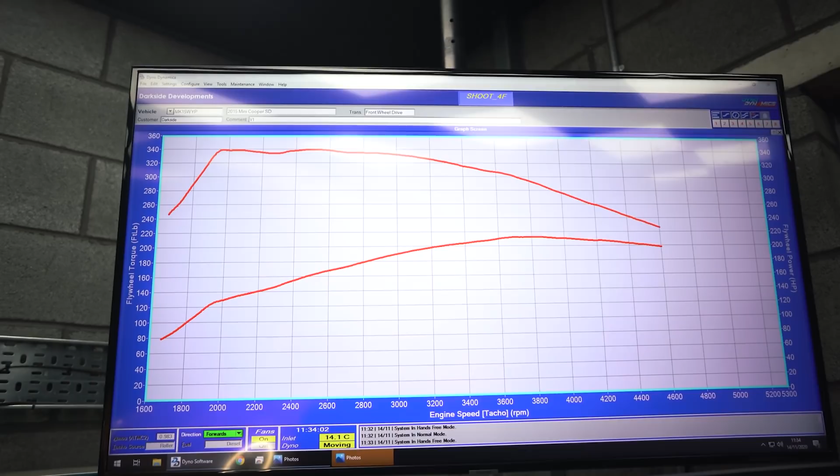Things have changed a little bit on this since I last drove it. I said we're going to get it on the dyno next, but we're quite busy. So we got a little bit of free time while the Mini was sat there, and we've had Gavin wrap all the chrome bits. The little intake that goes to nothing is getting painted black because it was a bit of a funny shape. We could have probably wrapped it, but Lee was doing some gloss black stuff anyway for a transporter, so we just said stick some gloss black on that, so that should look a little bit better as well.

So Danny's got some pictures and shots and everything. We've wrapped everything we could. These were going to be a bit of a pain, so we've ordered some black ones because you can buy them anyway. The handles were a real tricky job to do, but they look a lot better. And then the fuel cap, that's going to be sorted. We just ordered a black one because it's easier. We didn't really want to try and wrap that, so that's all good.

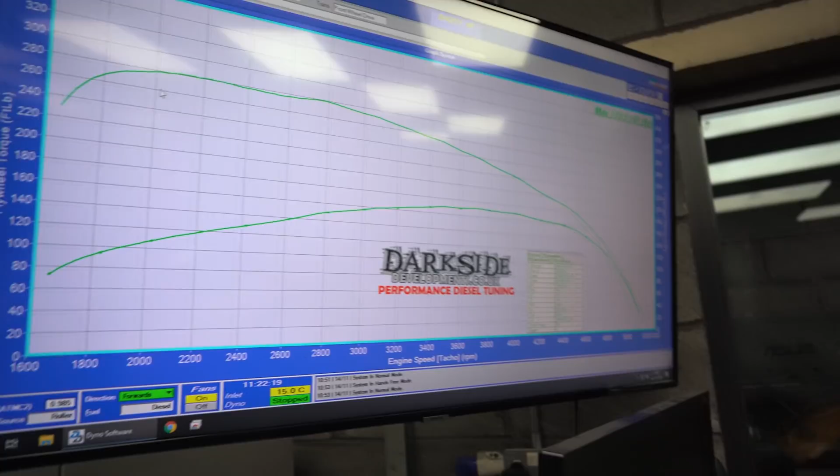So obviously everybody's here for the dyno. This is a 170 horsepower engine anyway, which is perfect, 170 horsepower. That occurs at what, 3700, 3800 RPM, so that's good. The book says 266 foot-pounds, but this has done 280, which is a few percent different, so that's absolutely fine.

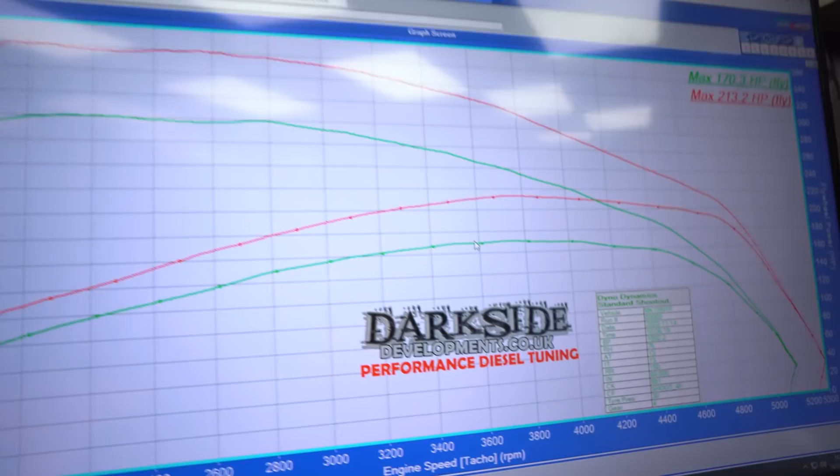So when I was out on the road test, I talked about the sort of spicy tune that we put on there, that we're actually getting 200 post-turbo, getting to 780 or something like that. So which was that, where are we? That's that tune. So 340 foot-pound, 213 horsepower. Obviously that was too much.

The main region it was getting hot was right at the top end, but it didn't really feel like you want to rev it too high anyway, so you probably only rev it to 4.5 grand before it's sort of past its best, but that's because the turbine is so small. The engine feels like it can breathe pretty good.

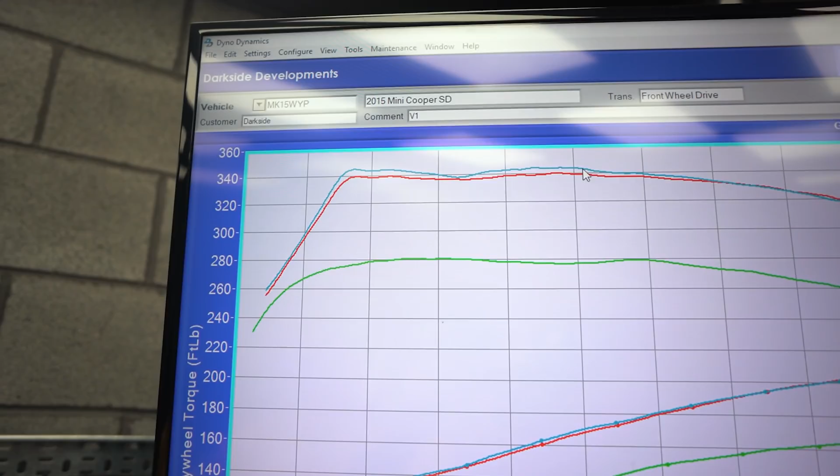So we'd done the other tune on the road and turned it down a little bit, and that's what we ended up with. So we actually ended up with a little bit more torque by lowering the boost request, and I don't believe we added any fuel. I think we took a little bit out, so God knows why it's gone up, but a little bit more torque.

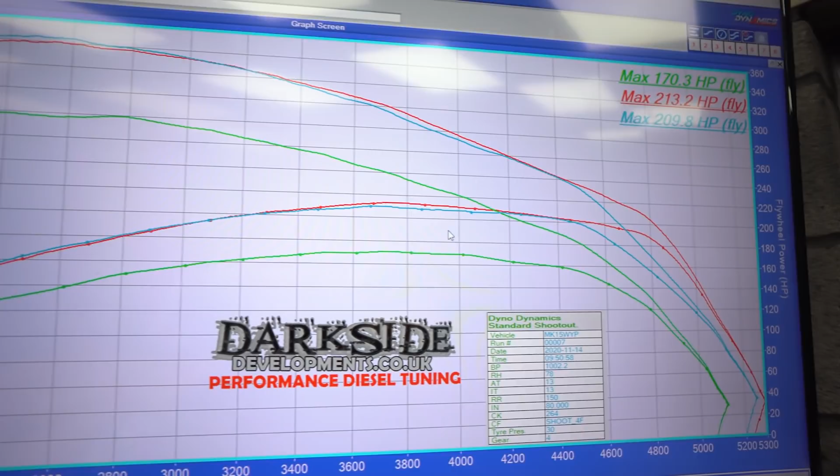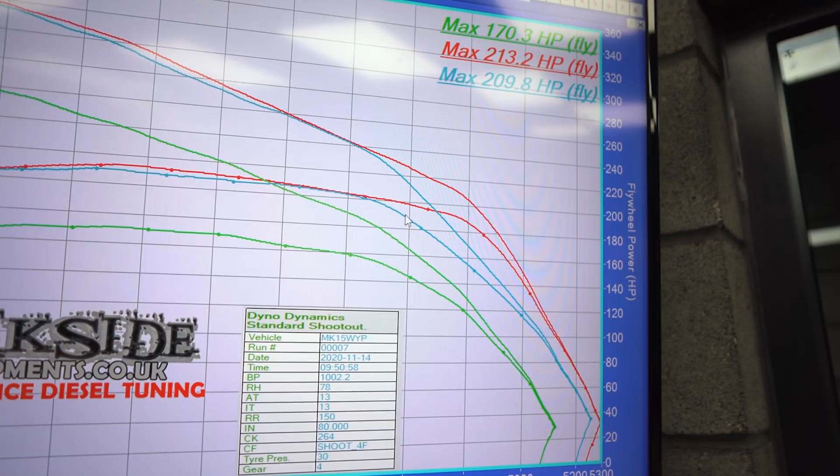We've only dropped a tiny bit of power in the peak power zone, 3800 RPM-ish, 4 grand-ish. And then we've lowered the EGTs by about 60 or 80, I can't remember exactly, where we've tapered it off here, and the EMP's dropped loads here, which is good. So, as I said, revving it past 4.5, there was no point anyway. It felt like it was getting strangled, and when you looked at the logs, the exhaust pressure, the exhaust temperatures, the boost pressure's dropping at that point anyway, because this turbo can't really do it.

It's not really made any difference to how it drives on the road at all, and we've only dropped the best part of 3 or 4 horsepower, so it's definitely a sacrifice worth making. So save them graphs, and that's the baseline. Obviously, we've got other mods that we want to do now.

The charge temps on this are not getting ridiculously hot. I believe on the dyno we're getting to about 50s. So I think putting an intercooler on there is not going to really yield a ton of power on the dyno. But I'm not quite sure if it fits in with the track driving that we wanted to do. Because we've got a sort of run plan that we want to do when we go to the track. Do this, do that, do the other, and see what difference it makes on the track. I don't think we're going to have time to fit an intercooler at the track side, and I think it's probably not as quantifiable. So we'll see what we can do.

We'll come up in the next video with the plan for what we're going to do next. There's a few little jobs we're going to do before the track, so they'll be recorded. Then we'll get to the track and we'll come up with what we're going to do.